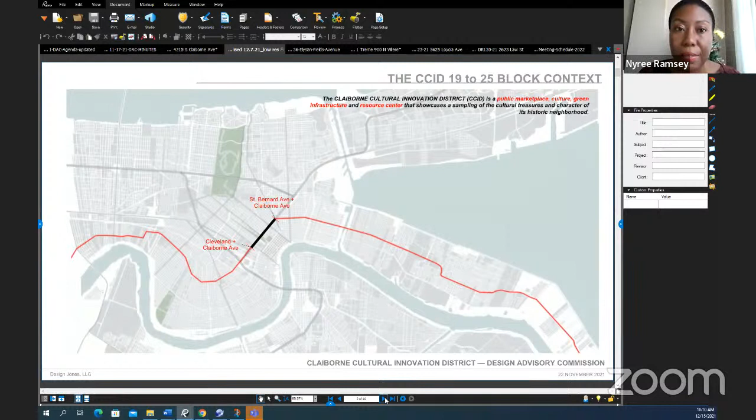Just to give you context, as we were going around and doing the charrettes to get this project done, to come up with the master plan, we recognized the need to speak to community interests. And so the project was split up into 4 zones. And what you see at the far right of that corner is how it has expanded.

We knew that there was an opportunity to really take advantage of some stormwater management initiative that the city is already working on, so we just wanted to let you see the full map of the area. We won't be talking about that area, but in addition to the 4 zones, there was an additional 5th zone where we wanted to take advantage of where the oak trees still stand in New Orleans along St. Bernard area, from St. Bernard to Elysian Fields.

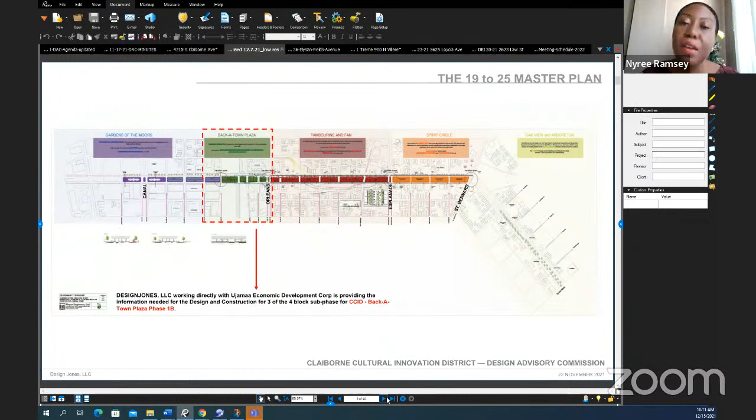So that'll be later forthcoming, but we like visioning with this group, wonderful team. Next slide.

So what came out of those charrettes are how can we make these improvements and these enhancements? And so what's at the top of that screen are what these enhancements are going to detail. And yes, that does mean a coordination of the city, the state, and even the federal government as we look to see some additional infrastructure support: cleaning and maintenance, infrastructure, lightening it back up, pedestrian protections, the furniture, which you'll see through this presentation, and of course art and color, that was approved at the last presentation, and we'll go over those improvements and enhancements again.

To orient you to the 4 areas, on the left of that screen is the Gardens of the Moors, where we really do pay homage to some of the African influences in New Orleans. Back of Town Plaza, taking advantage of the relationship to reconnect communities between the Lafitte Greenway and Lehman Park. We'll talk specifically about how we'll do that in this presentation today.

Then Tambourine and Fan, which is the area between Orleans and Esplanade, is really to celebrate the wonderful culture of New Orleans and of course our civil rights icon, Jerome Smith, who founded that organization, that youth group. And so the area there, the market, will focus on youth initiatives.

And last but not least, Spirit Circle, which extends between Esplanade to St. Bernard. What you can see in that section a little bit, there used to be a roundabout at that area. So we have been in talks with the Regional Planning Commission, in addition to DOTD, in terms of how we can get that roundabout back. That, of course, is another way in which we can think about how to slow traffic and protect pedestrians. Next slide.

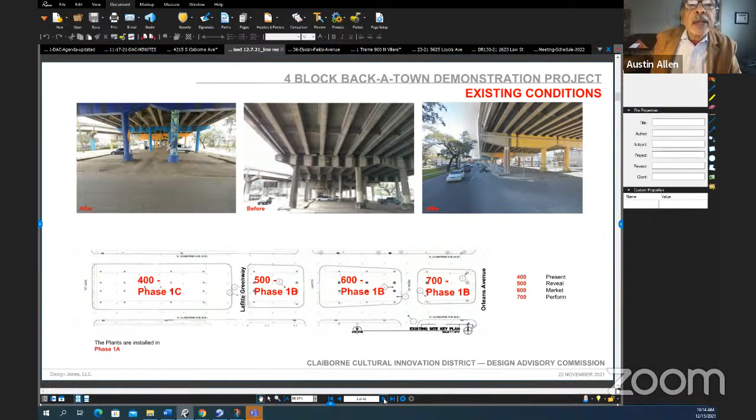What's important in the photographs up above is you can see we've begun some of the mural work. You can see those marks coming down on the bridge are caused by water dripping from above. There were some corrections done. If you look all the way to the right, the Department of Transportation and Development actually put in a gutter system to block that kind of marking from happening. Next slide, please.

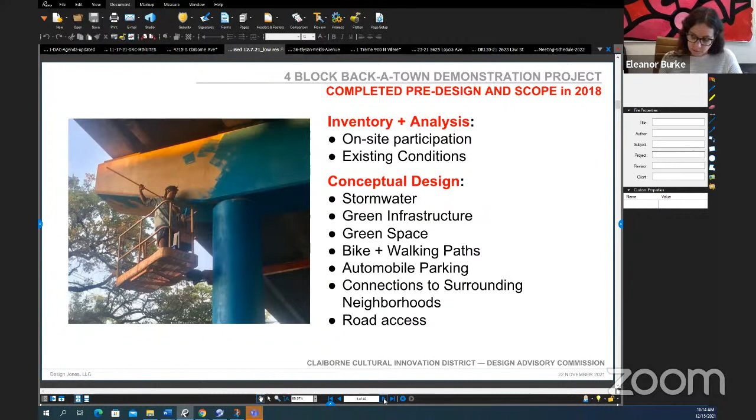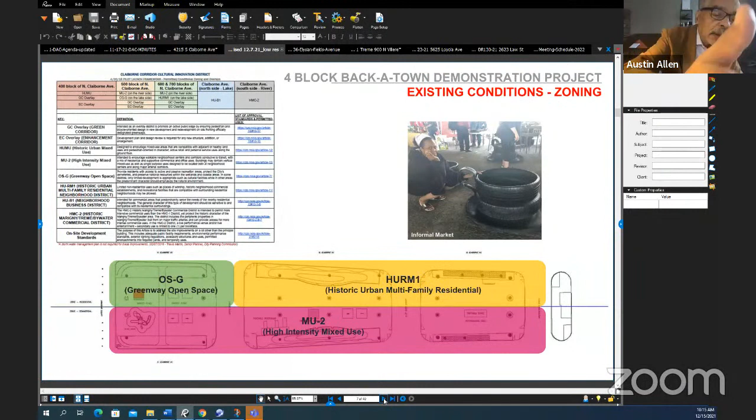These are the things that we went through in terms of 2018. Let me go to the next slide, which I think is significant. We fully respect the zoning code as it exists today, and you see it is right through the middle of the neutral ground where the divide happens in the zones. So we have structures, or even temporary structures, below that line and over at the Greenway open space.

Next slide, please. This was from the March 7th meeting. I just wanted to make it clear that we had approval for canopies, string lighting, and landscaping from the March 7th, 2018 meeting. There was a request that we get approvals on all those items, and those things were approved, at least those initial elements, through the 1A.

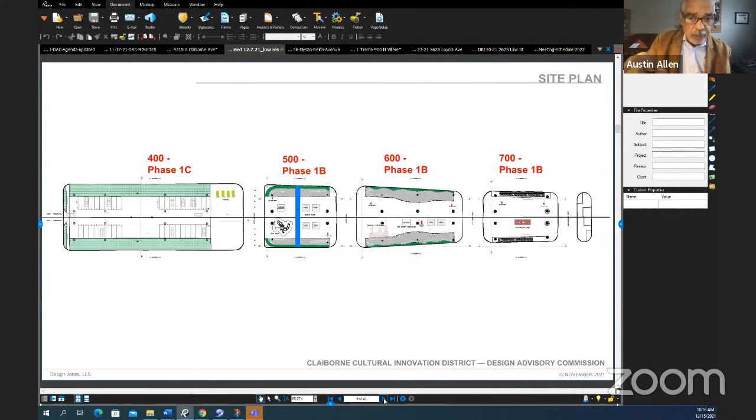Next slide. This gives you a master plan, and you can begin to see how we're dealing with everything from stormwater in the green areas to parking in the 400 block, and some of the other things we've got planned in terms of 500, 600, 700. Next slide, please.

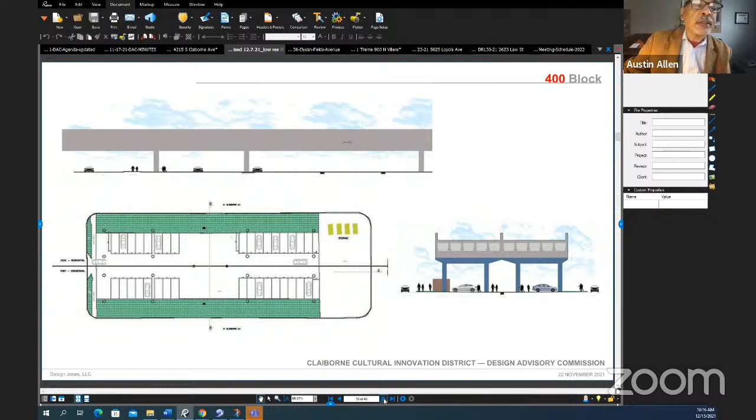In the 400 block, as you can see, the storage, those four lime green rectangles, are containers that will be in the 400 block to store kiosks and other elements of the public market that will be there. In those blank spaces in the parking, there's room for at least an additional 12 more parking spaces if needed. Next slide.

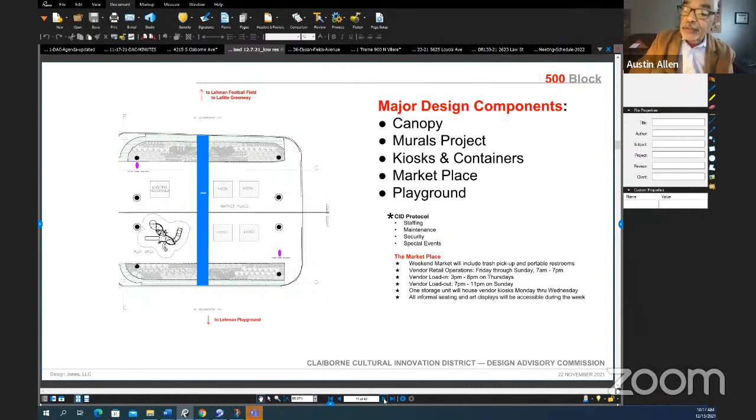In the 500 block, you can see its canopy starts here. The mural project has already started. Kiosks are used here. This is the active marketplace beginnings and a playground. The blue strip going through is a linkage between Lehman playground and the Lafitte Greenway that cuts through the block. You'll see that if you're there on location, it stops right at the neutral ground both ways, and this is a continuation. Next slide, please.

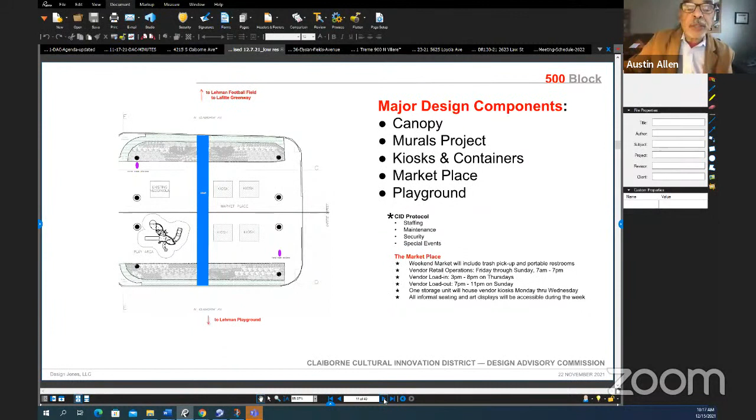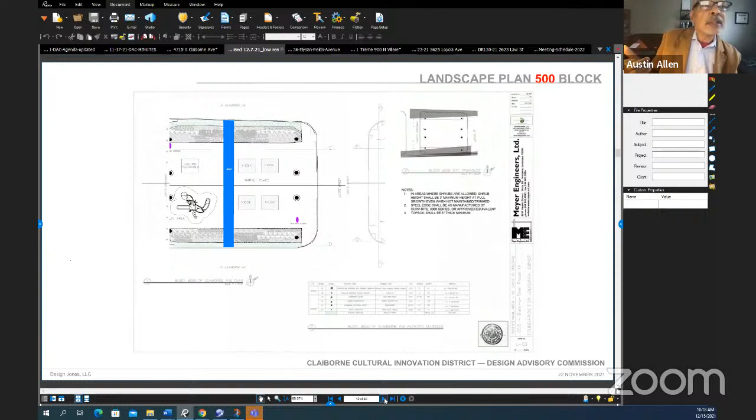And this, of course, comes from 1A. We just wanted to put it in so that people knew that the landscape part of this had been approved, and had DOTD approval too, in terms of being able to site things in terms of automobiles. Next. That concludes your 10 minutes to present.

The committee can now ask any questions they may want for clarification. I'll point out that if the committee feels additional details are needed to complete our review, I already spoke with the applicant about that, and possibly we can be clear about what we need and they can come back at the January meeting. Or if you feel we have enough to review now, that would be fine. But this document shows more scope than they're really requesting us to review at this time.

So if we want specific questions about the scope we're reviewing, now would be a good time to discuss that. Can we get a definition of the scope we're reviewing right now? Because are we only looking at 1B? Yes, we're looking at the 400, 500, 600, and 700 block.

And the 400 block is going to be parking, storage for the markets, and stormwater management. So already we can see that not enough details are provided for that block in terms of parking layout and pedestrian circulation within that area. And we may want to see further details on the storage containers that would store the temporary markets.

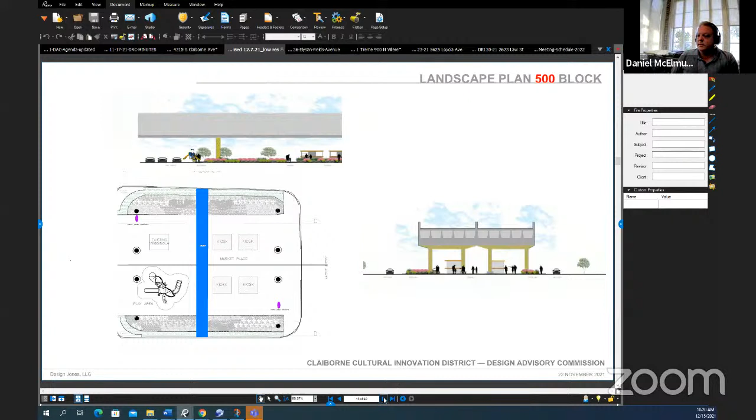And the fourth item is that there's going to be some site improvements around the public markets. And I'm seeing that additionally, there's the playground that we would be reviewing. Can we go to 2 more slides down, please? Did I mention the canopy? Because that's kind of the main element. That's what we're going to.

So on this - this image is very similar to the image that we were sold in the first review in 2018. So my question is, is the funding in place to put this in place in this project?

Yeah, the answer is yes, the funding's in place, and there will be improvements to this, to make sure that it fits with all the elements that we have there. For instance, one of the main things to keep in mind in terms of the improvement is because DOTD, to our requests, did put up the gutter system. So we do have to take that into account in terms of how we put up the canopy this time, because the gutter system was not there previously.

Okay, well, that kind of addresses my next question, is who's actually putting up the gutter system? Is it going to be you or is it going to be DOTD? DOTD. Okay, and then, so like this image shows all of the cross beams as being white. Are y'all going to repaint them or just clean them to the base concrete? Or are you going to do the painting - the painting was never finished.

And I love this idea. I don't want y'all to think that I don't love this idea. But I want to see it executed and completed, not kind of left half done. And that worries me, so that's why I'm asking about funding. You're selling us this image, which is very bright, which I like. I think that's going to sell the space for people. So I just want to make sure this is what we're talking about.

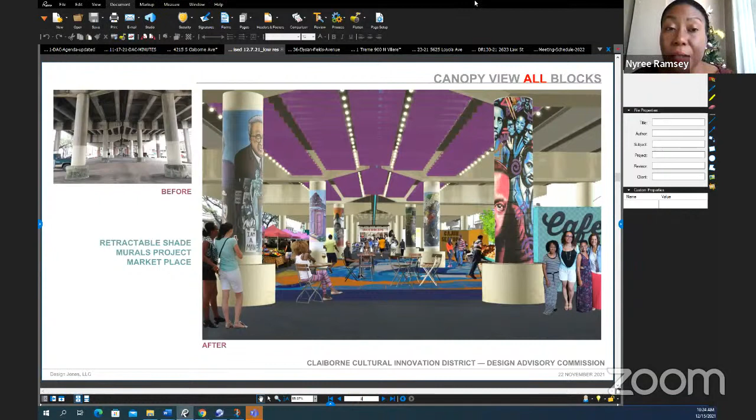Just want to clarify a few things again, recognizing this is a public-private partnership. We are all about making sure we identify the best resources for success. This project is actually being run through PlayBuild, which does most of their programming along the neutral grounds, and they take over space to make it inhabitable for children. This is just one component of it. The exciting part, and what we'll probably do for next time, Austin, is to share the slides of how we activate the space with PlayBuild so you can see how the children are protected from the street.

The area will be this is a container. So that's the innovation part. This will be closed off, so it will not be in use unless there's actual activation by PlayBuild under the bridge. We just want to make clear that there's a space for young people when the marketplace is happening, and when other community events are happening under the bridge. We wanted to include our youthful spirits, but it will be managed by a particular organization.

So is it going to be the play equipment showing on the left, or the play equipment on the right? Which one are we talking about? It'll be a combination of both, but we wanted to be clear in terms of how we could manipulate the container to be something as detail oriented as the slide on the left. But certainly we wanted you to see the container aspect, which is the design on the right.

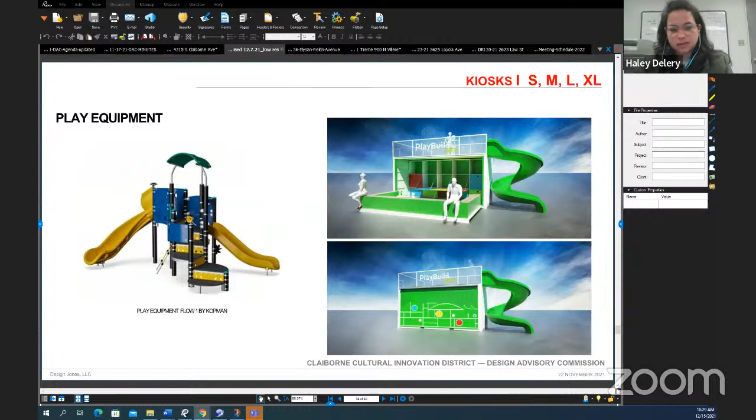Hey, let me say one more thing, echoing something you said at the beginning. A pedestrian plan is critical with this, just to understand how people are moving into the spaces and crossing the streets. So pedestrian plan is critical, incorporating the sidewalks on South Claiborne.

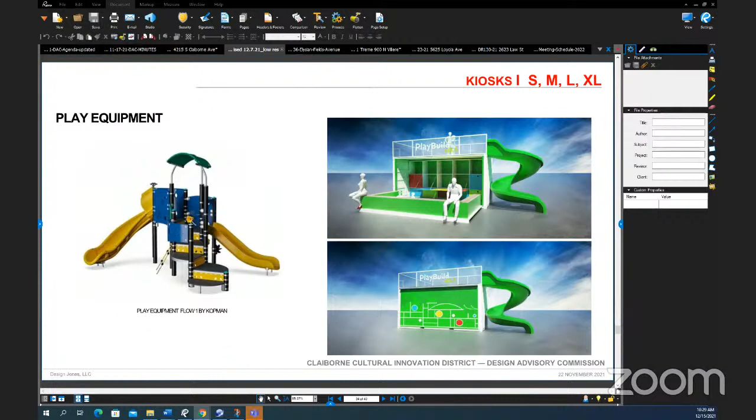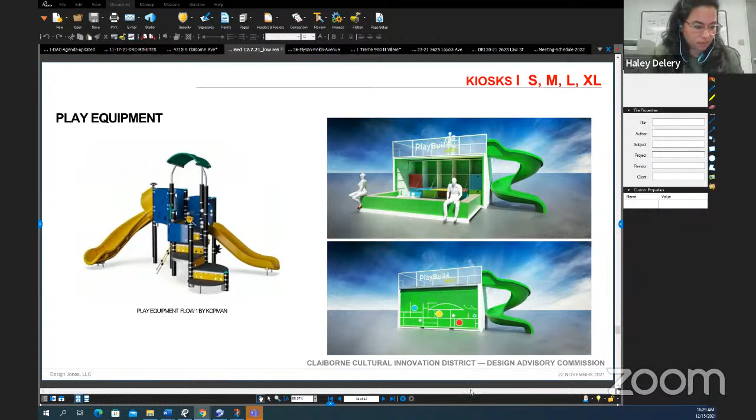This property is at 4338 Elysian Fields Avenue. This is going to go to the City Planning Commission. It's a proposal to construct a community facility on a site with over 100 feet of frontage in an EC overlay. The staff planner is not yet assigned.

Yes. So what the owner is trying to do is build a community center. This is the church entity that currently owns the property, and what they would love to happen here is a community center. They do a lot of community service with food bank services as well as disaster relief, and they want this to help with health in the community. They also have a partnership with the local university so they can do further work with that same entity at this facility.

Currently, what will be there, I think in our floor plans we had a basketball gym, but it's mainly multi-purpose, as well as kitchen, office, and restrooms. And that's pretty much it.

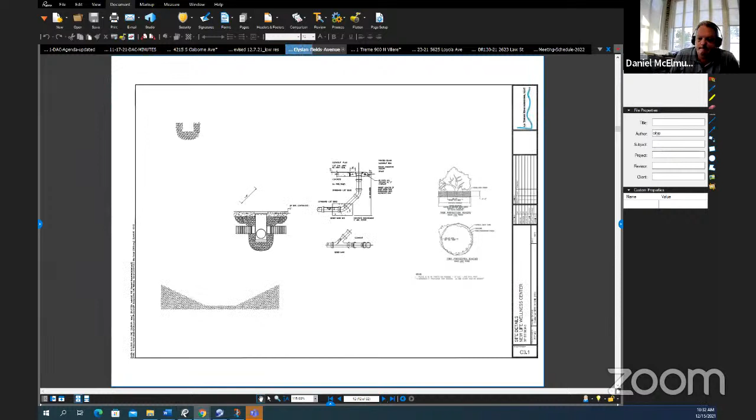Thank you. Is there any committee discussion on this item? Is parking allowed in the front of a building on Elysian Fields? It is in the zoning district. We've worked with some of the departments and made revisions along the way to the site.

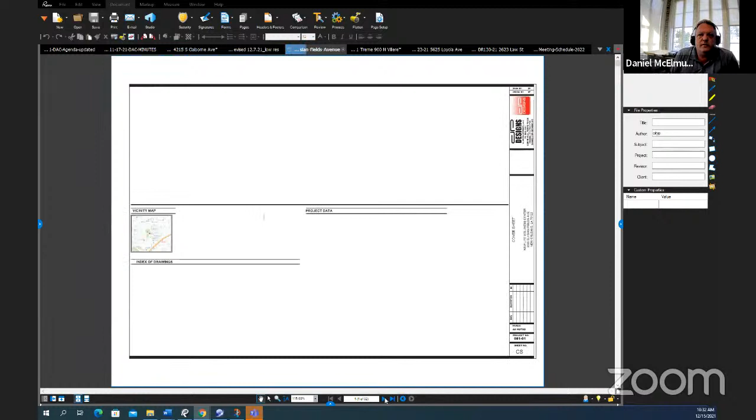Are street trees required, or is this a different zoning that doesn't require street trees? It's a residential district which does not require street trees.

Hi, this is Louis with Public Works. We want to look at the driveway. So in the city, it looks like you have a mountable curb here. We would just be running a mountable curb, or a more straight driveway from that curb. It would meet the sidewalk at sidewalk grade, so there wouldn't be any ramps like you're showing, on page 5 of the PDF.

Okay, so it's a little different than what you've got drawn. Then we'd like to see a sidewalk connection to Stephen Girard and Elysian Fields, if you could. Coming awfully close to it. I don't know what your grades are over there, but we normally like to see some kind of connection besides just that driveway.

Okay, if we can extend our sidewalk along the building to Stephen Girard. Okay. And the only other comment I have is that for these plans, you will need to submit a tree protection plan for the 2 live oaks existing in the public right of way.

This is Stephen Kroll with City Planning. I'd encourage you to look at relocating the dumpster, possibly back here. It's a highly visible location, and I'd encourage putting it in a more inconspicuous location. Okay.

I'm curious about the elevations of the structure. I think it's Plan A4.0. Do you happen to know the page number in the PDF? No. Page 20. Was that 20, Eleanor? Yes, page 20. Can the applicant describe the materials?

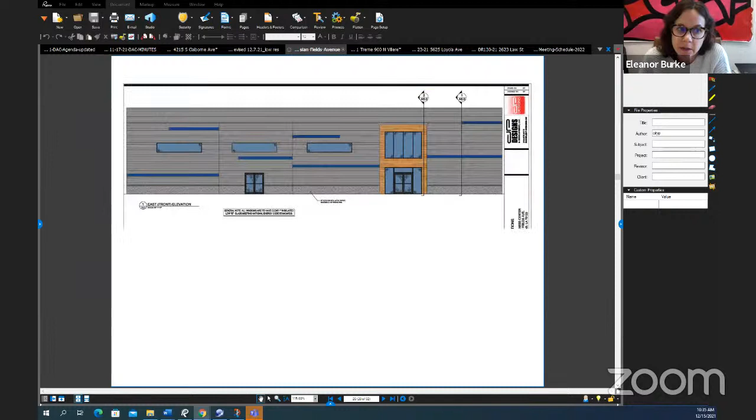Yes, right now they have wood at the main entry. In the main entry they have glazing in the wood, and then they have metal paneling, horizontal, on the side with glazing to let light into the gymnasium.

Does the wood panel project at all, or is it coplanar with the metal? It projects 1 foot off of the facade. Does it wrap around as wood? Yes, it returns as wood at that entry point. So that entry point sticks out 1 foot off of the elevation of the rest of the building, and it does wrap and return back into the building.

My feeling would be that the projection might be more successful if it was done in metal panel, but maybe with a different treatment. I find the insertion of wood at this part of the building just kind of out of sync, maybe not as successful as it could be. My other question was for the CPC staff: do they have glazing requirements at the front elevation they need to meet?

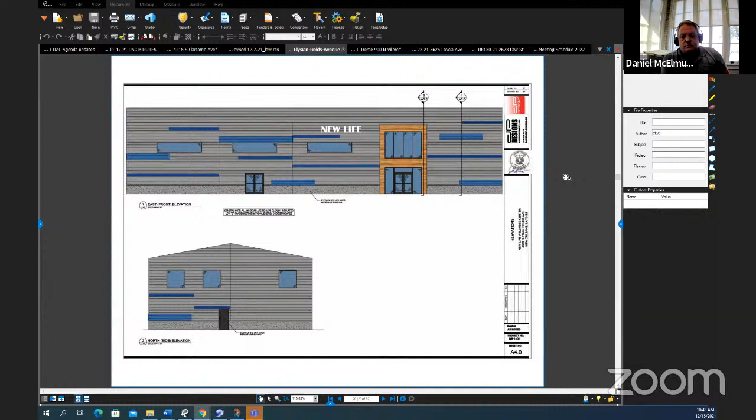It's a corner property. We have required this on others to either put the parking on the side and have the building be on the corner, or have the building completely face Elysian Fields and have the parking against the cemetery. The context, to me, is that it's up against the cemeteries. So it's not really, it doesn't bother me, but it kind of looks like a warehouse. And we can work on the exterior skin.

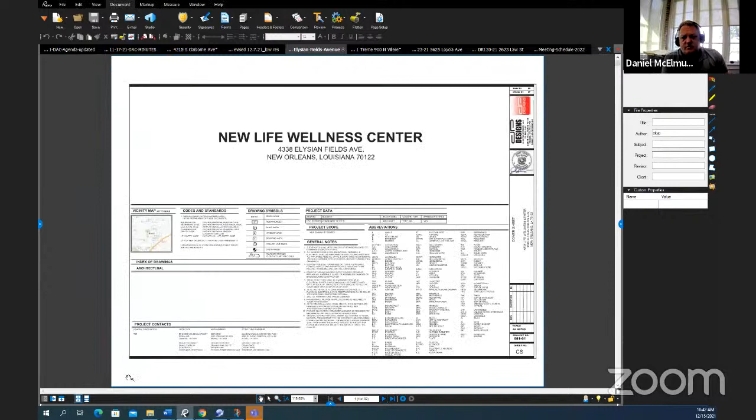Now, let me ask you something in that regard about moving it to the curb. We've tried to move the front, and I think the problem is going to be access. And if we lose parking or don't have an adequate number of parking, would there be some kind of variance when flipping the building? Aren't y'all asking for a variance if we move the building now? Well, I would probably have to if I had to.

Well, I couldn't fit the building at its current size if I had to move the building to the corner, because we did look at that. And then put all the parking in the back, and then you would have to, of course, not come off Elysian Fields, but off the side street to get into the property. So pretty much the front would face the cemetery. Even though I would have a front facing Elysian Fields, we would technically have to have two fronts.

But I think when we did our schematics, the parking, we lost parking. But my question is just, if we don't meet the parking requirements, is there a mechanism for asking for a variance?

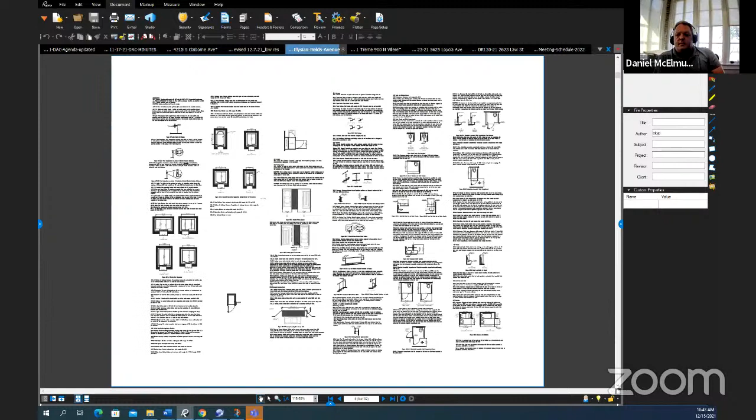I don't know how you would lose parking if you just flip the property line. If you just flip the layout and come in off Stephen Girard from the end, you're not losing any parking. I don't understand how you're losing parking when all you have to do is literally mirror it and remove that driveway coming off Elysian Fields, putting it instead at the end off Stephen Girard. That will allow your customers to come in off Elysian Fields, regardless of the direction they're on. Whereas if they're coming off Stephen Girard, you've got an immediate option to go left or right on Stephen Girard, and then left or right on Elysian Fields, versus only one direction to come in and out on Elysian Fields.

So I really don't buy that you can't have pedestrian access to Stephen Girard and Elysian Fields, and easier vehicular access, if you flip this site to have the building in the front and the parking lot in the back, between the building and the cemetery. I just don't see it as a problem.

This is Haley. This has not yet been assigned to a staff member at City Planning. However, just to answer your question, when we review the conditional use, there is an opportunity to review a consideration for a variance for parking if it's necessary. I just want to point out that this is the advice from the DAC, to reorient the location of the structure. It would be great if you could take these comments into consideration and do that.

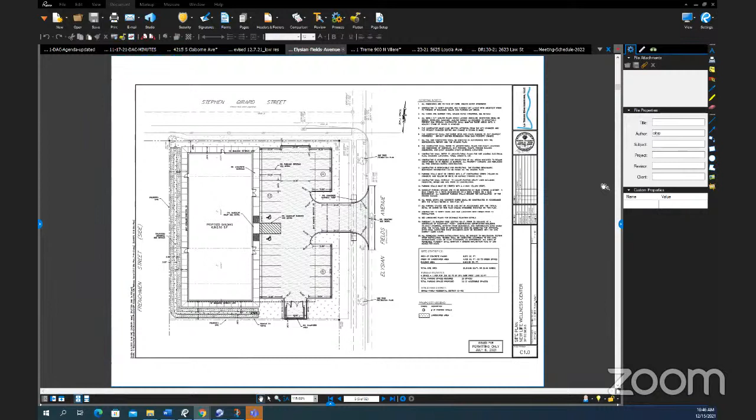So I appreciate your willingness to work on that. The building will definitely be, and really we'll try. What we'll do is try to see what we can do with the building, in the same regard as it now being a corner building, pushed up against the curb. We'll see what we can do to help delineate it, keeping the metal but not being perfectly flat, especially with the parapet heights, and then maybe some protrusions, playing with the elevation of it, to break it up. Hopefully that'll help. We can definitely play with the skin once we move that.

And I think you have some foundation planting requirements. Planning can answer that question better, but for your on-site stuff, I think if you do flip it, you'll actually have a better opportunity to do the foundation plantings and remove some of that sidewalk. Because then you can use the Stephen Girard sidewalk and the Elysian Fields sidewalk as part of your site circulation, versus having to put in your own sidewalk, and that'll reduce your stormwater runoff as well.

I think also, flipping it will give you the opportunity to play up the corner as an entry, which is fairly common for corner buildings. That could provide some opportunities for design interest at the corner, which could go a long way toward enlivening the building and helping it feel more nestled in this corridor.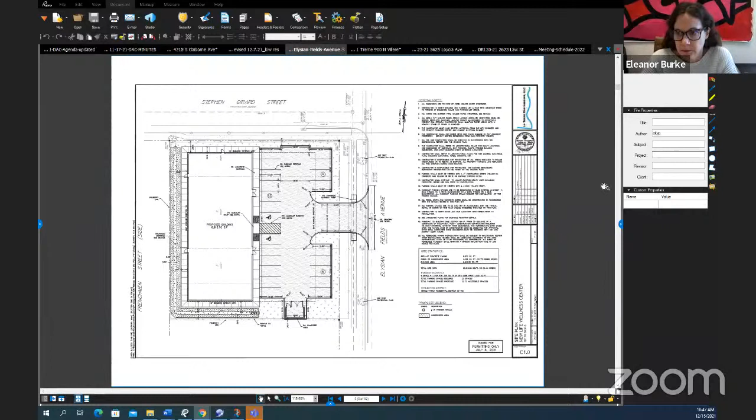Okay. Can you kind of talk to us about the two entryways, and why you have two entries in the front?

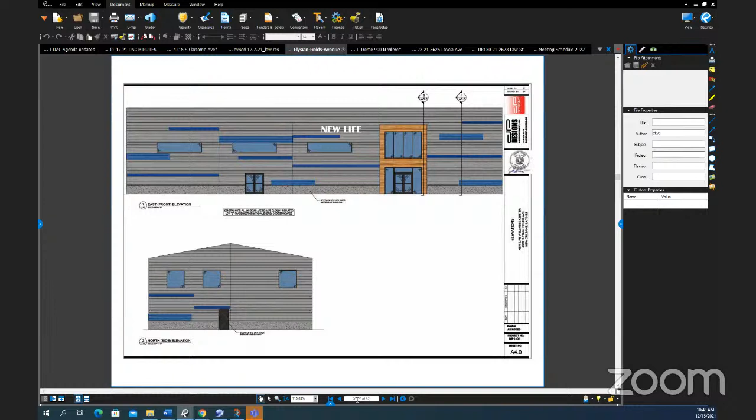Well, originally what we had was one main entry, the one with the wood paneling. The other entry was mainly there because of the egress out of the gym, but also the church looked at disaster relief and mass food drives, mass people coming into the building. It's easier to have them circulate directly into the gym for clothes giveaways or food giveaways, getting people in and out without having to circulate through the lobby. The point of the double door entryway was to get people in and out of the building, or even serve as a serving point.

They said for disaster relief, with one of the entities they work with, they may have the gym full of goods and things to give away. You can literally line the sidewalk and directly hand things out. That was the point of having that second entryway right there.

Okay, it may shift to the rear of the building now that you're putting the parking in the rear, and the main entry may go towards the corner. This may help with how the organization of the windows and the structure look.

No, I think what's going to probably happen is when we flip it, the building will kind of get mirrored. So what we'll try to do is have some of these same elements, taking into consideration what the board has said today, but also trying to fill that corner to make sure we have a nice corner entry into the building. So we'll definitely work that in.

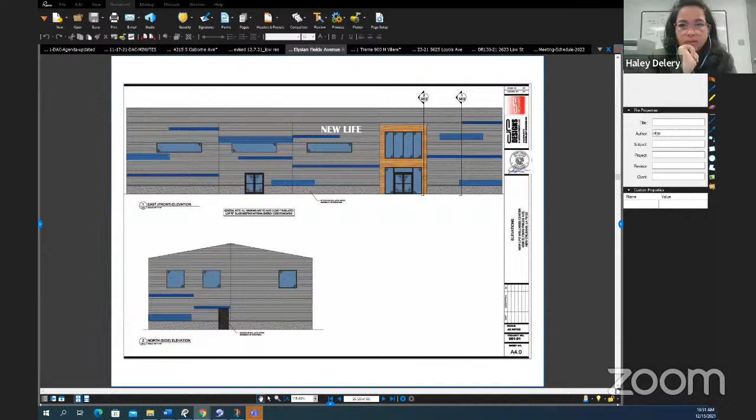Alrighty. I think the comments the committee has made are very clear, both to us as staff and to the applicant, so I don't know that it needs to come back to DAC. I think we can handle these comments administratively.

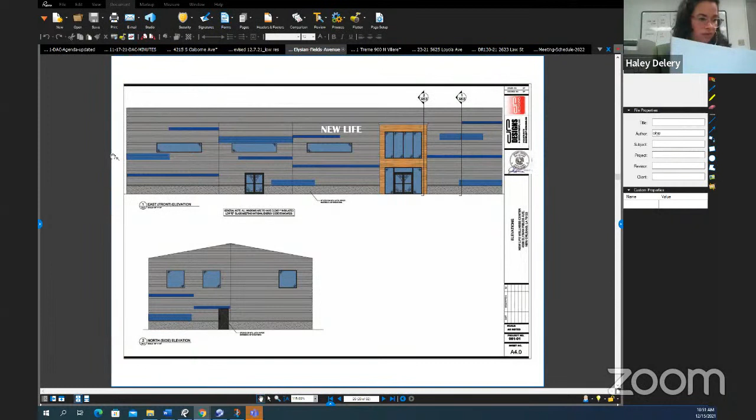Now we're moving on to item number 5 on the DAC agenda. This is design review docket 7621 for Treme Recreation Center at 900 North Villere Street.

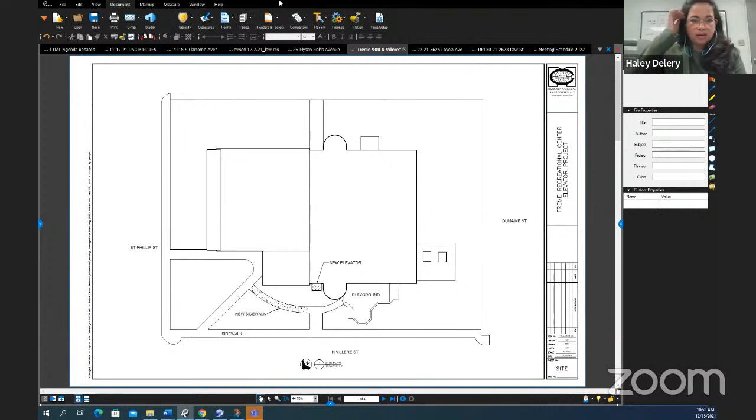We previously reviewed this at the DAC meeting and had requested that the applicant come back and provide us floor plans so we could review alternative locations for the elevator, because placing it at the main entry was not a satisfactory solution. Between that time and now, Capital Projects met with the community and have also added to their presentation additional justifications for why the elevator could not be located in an alternative location.

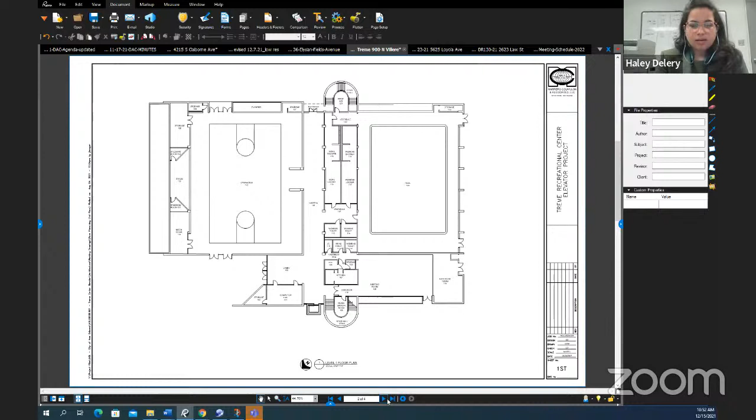City Planning has spoken with Capital Projects and said that the advice of the DAC, because this is a public project, is not binding. It's up to the sponsoring agency who submitted it whether or not to take the advice. So just keep that in mind.

Okay, yeah, this is Carlos Duran. And actually, Robert, so Greg DeCourcy, our architect, is on vacation, so I was sitting in for him on a meeting. Robert, you're gonna have to help me here.

I know from talking to Greg that several locations for the elevator were looked at and considered. Because of code, structural issues, space issues, egress and those kinds of things, the elevator wound up back at this position, and it's just the most logical place to put it.

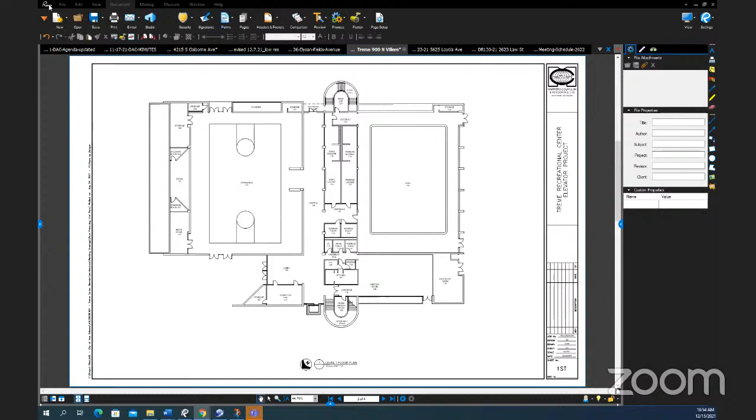One of the other things everyone needs to understand is that the back of the building does not provide the security aspects needed. Also, state fire marshal requirements mean putting an elevator with an exit there doesn't provide enough space for exiting the building. The main reason we decided on this area is, one, the security from the front desk, which is directly across from it, and it's accessible to the elderly so they don't have to go the long distance of the corridor, they can just easily go into the elevator to the second floor.

So, like Carlos said, we viewed many different aspects to this. The location we have also provides sufficient support for the elevator foundations, and it creates a better building aspect there.

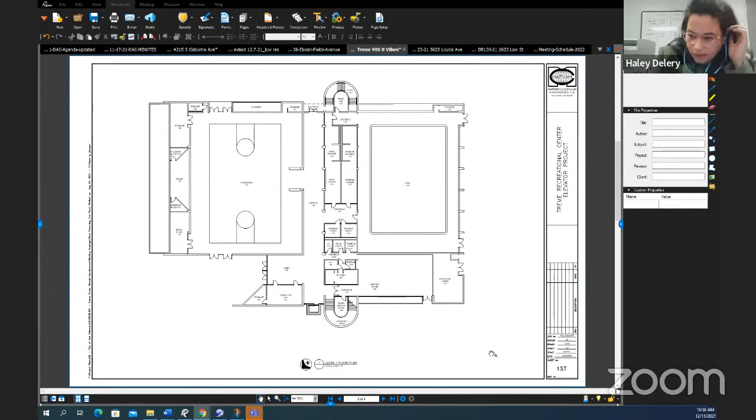Okay, thank you. Does that conclude your presentation? Yeah. Okay, thank you. And I would just like to ask, how did the community meetings go?

We arranged two different meetings, three weeks apart. Nobody came.

Is there any further committee discussion?

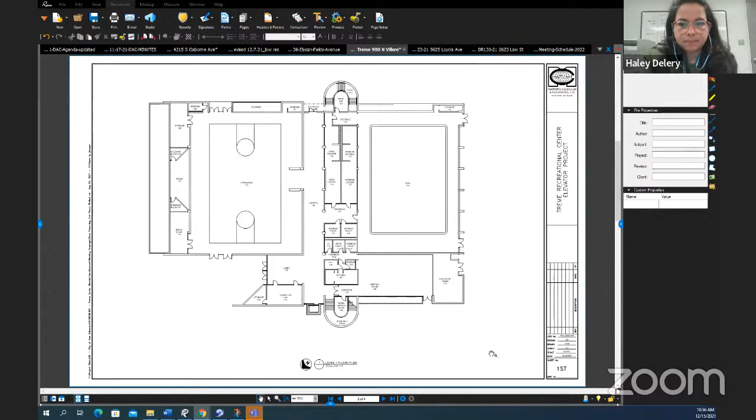We go back to the site plan showing this proposed sidewalk. I assume you know this, but there is a hill there. So this looks pretty good in 2D, but are y'all planning on building some kind of retaining wall, or regrading the site somehow? We did not plan on regrading that I can recall.

There is an existing sidewalk in there that we were just going to re-pour. Is it an existing sidewalk that's already where that new sidewalk is shown? Yes. How recently was that built? It's been there since the building was built.

We're talking about this sidewalk that's being called out as a new sidewalk. I see, that's right off the main walkway and it leads into the playground area. There was a straighter sidewalk in there with just a little curvature. The elevation doesn't change until maybe about 20 feet further inside that area. But there wasn't a new sidewalk there. There's no sidewalk there.

Oh, I'm sorry. I thought there was. No, there's no sidewalk there, but there's landscaping, there's elevation, so it's like a small hill there. It's not as simple as what's shown. I think it would require some kind of regrading, or either that or cutting into it and building retaining walls on one side or the other in order to make it work as shown.

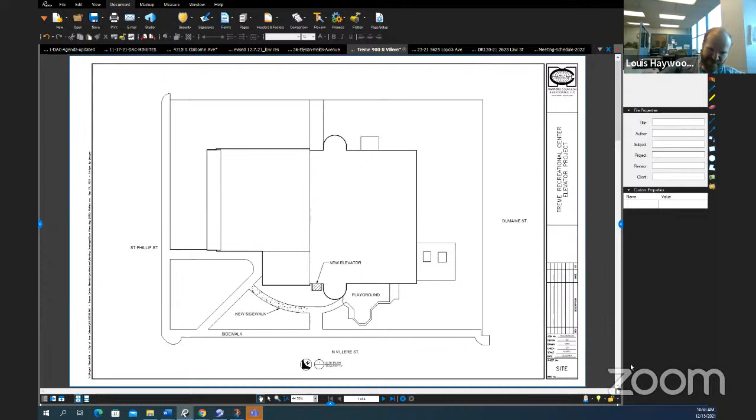Robert, what's the funding source for this project? State funding, state capital outlay, and bond money.

You do know that every time you dig around the Treme Center, you have to have archaeologists. Yes, we do, and we have already contacted the archaeologists on that. Okay, good.

Louis is right, that was going to be my point, that in order to do that sidewalk, you're going to either have to cut into it to have it at grade with the other sidewalks, or it doesn't matter, you're still going to have to excavate. Right, we'll need some minimal excavation in there. And then, because it has to be accessible, you can't have more than 5% slope.

Correct. Then tell me again why it can't be in the stair tower. I know I keep harping on it, but I don't buy it. The stair tower in the rear, not the one in the rear - I know that's the fire exit and all that other stuff. I'm talking about the one that's right there, immediately to the right of where it's located, in the music room, and then it lifts up to upstairs where there's just a planter right now that could be a lift.

You don't even have to do a complete elevator shaft. You can just do a lift system and have it go up right there. I don't understand why it can't be put in that space when that's what that space was designed for. We looked at lifts and it just doesn't give the flexibility for the elderly in there. This is a more secure area to put an elevator in this location.

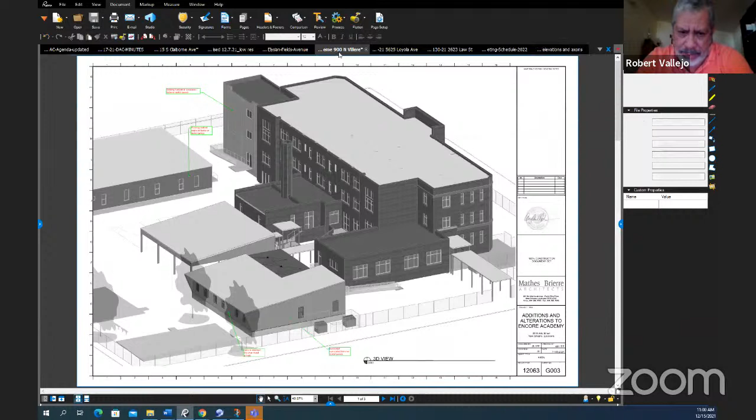Well, we looked at all the different chair lifts along the corridor. It didn't make sense for it. The entrance, when I was over there, is generally locked at nighttime. And the entrance on St. Philip Street is one of the main entrances that the general public is using at this time. In fact, the last time I was there was last Tuesday night, and the center had already blocked it with tables and chairs.

They had a dance recital going on at the same time, and they wanted to check everyone there for temperature and entry points. So they left the St. Philip Street entrance open. They were not using this North gallery exit entrance. So I beg to differ with you on that.

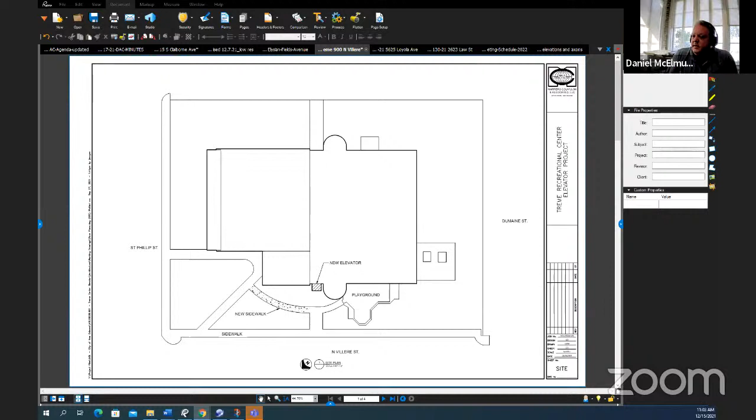It's exercise, and there was also an arts and crafts room, I think, for ballet practice and all. There's a dance room and multi-purpose rooms on the second floor. Okay, all righty.

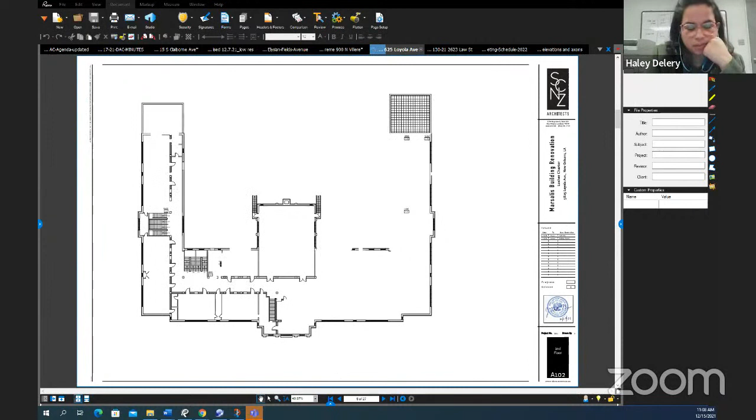Is there a drawing? Stephen, are you able to flip through? We can, yeah, I'm flipping through. If there's any particular sheet anyone wants to see, just let me know. All right, is it not displaying? We're seeing A101 and only the image at the top right has become viewable, it's slowly populating in. Okay, I'm on A102 now. Are you seeing A102? We're seeing A102, however the floor plan is not, it's just slowly coming available. Yeah, got it, okay. Just wanted to make sure things didn't freeze up or anything.

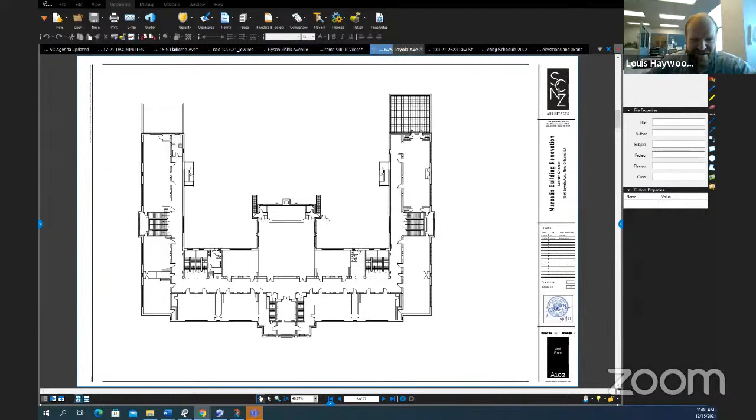I'll just jump in real quick, from Public Works, I need to see any sidewalk repairs that are necessary. Looking at the most recent photos, it looks like there's some lingering issues on Joseph Street, and there's probably a few other places where you just have some settled sidewalk creating some trip hazards, or sloping sidewalks. So just walk around and pick up any necessary sidewalk repairs. There's some broken sidewalks on Freret Street as well.

Particularly on Joseph Street, it looks like it has about maybe 20 feet of sidewalk that could be replaced. Some around the trees in the middle of the block, looks like there's some settlement around those trees, probably caused by some roots. Yeah, we'll definitely take a look at that.

I don't really have any comments. If there's no further committee discussion... Oh, could I ask one more question, just out of interest I guess. You're removing a sidewalk, or not really a sidewalk, but a walkway from Loyola Avenue in the site plan, that goes to that gate. What brought that on?

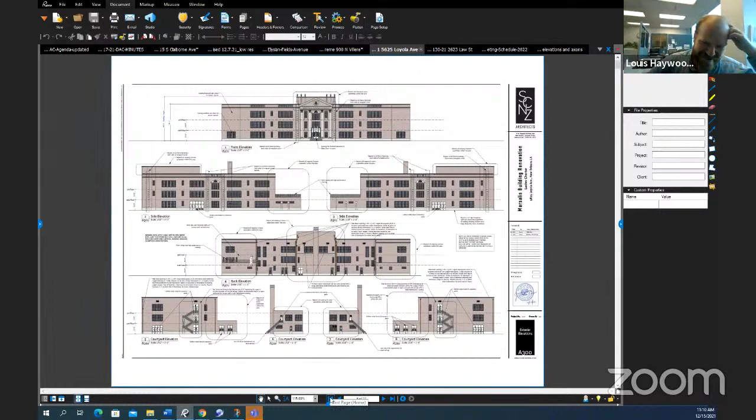Do you mean on the Joseph Street side, I think? This is coming from the Loyola Avenue side, going to the side of the school building in the back. Yeah, from the lower, on that plan, you mean the lower portion there? Mhm, yeah.

Originally the building had two entryways. Sometime during the 80s or 90s, that second lobby was turned into a classroom, and the facade was replaced with windows instead of doors. So basically that big paving that used to be where the buses would drop off the students and they'd go into the building now kind of leads to nowhere.

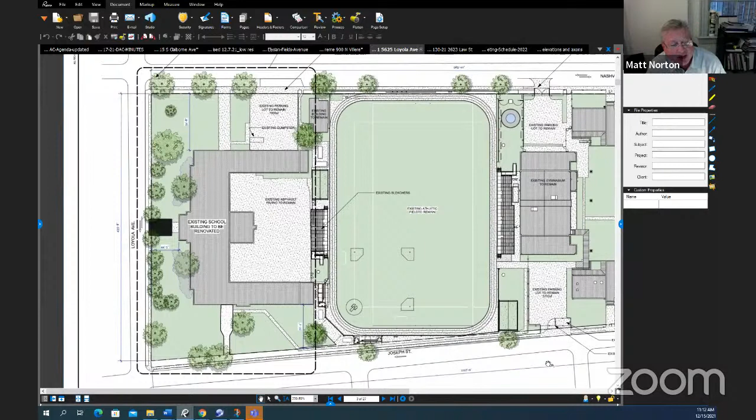So we're just taking the advantage of removing that and creating some more grassy area. That's the same thing, the walkway that goes along the face of the building to Loyola. If they're talking about that, Loyola is the main entry there, and right now they have concrete paving that's in really bad shape at that little entry plaza to the building. So we're pulling that up and replacing it with permeable pavers.

All right, I'll try this again. Are we talking about the same things?

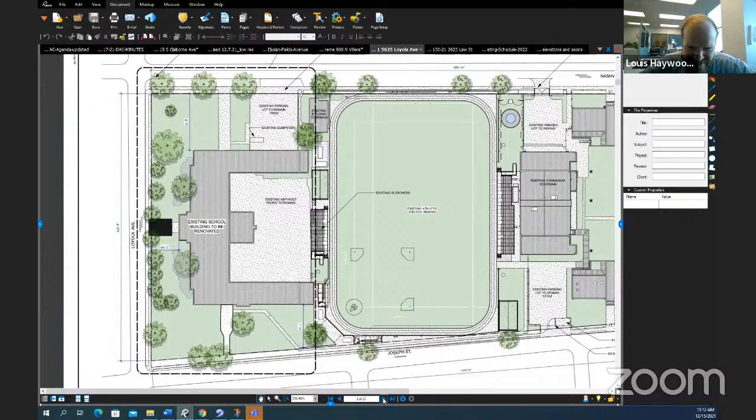So you're on Loyola Avenue, about 100 feet from Joseph Street. There's a sidewalk you're calling to be demolished in the plans, just a 6-foot sidewalk that's really not used. That was an opportunity to take up some paving that was superfluous there.

So you're not going to have—there's a gate there today, right? There's like a historic fence with a gate, you can see where it's pointing. There's an existing 3 to 3.5-foot high steel picket fence there with a gate in it. We're demolishing that and putting the new fence at the property line. So you're bringing the fence all the way out. Right, exactly.

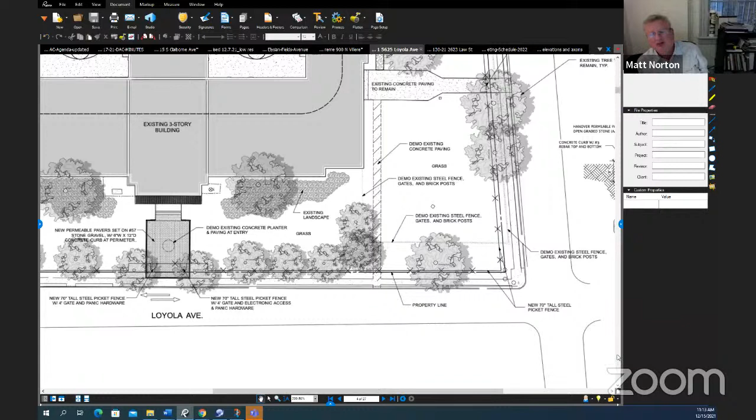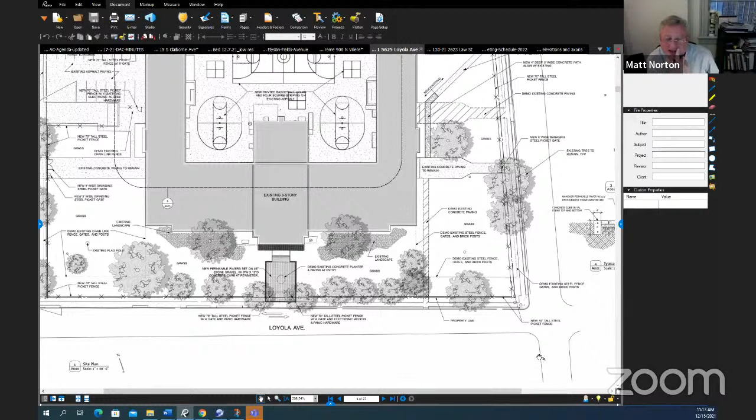Do you have a detail in this set showing how the fence is going to be installed? It's basically in the spec—a 70-inch steel picket fence. It'll have 2 rails at the top and 1 at the bottom with little arrow expressions at the pickets. It'll closely resemble the one Fortier has facing it now on Freret Street.

I'm less concerned about how it looks than how it's going to be installed, since you're hitting quite a few—at least 2—public street trees. I don't see a tree protection plan, or how the fence installation is detailed around these trees, where you're taking out the existing fence and installing the new one behind them. I think putting that fence right up against the trees is a bad idea. There may be a need to bump out the fence at those points so the trees have room to grow and don't mess up your fence quickly.

Yeah, I think that's along Joseph Street—those are very large crepe myrtles there. We will pull the fence back from the property line to allow them some room to breathe.

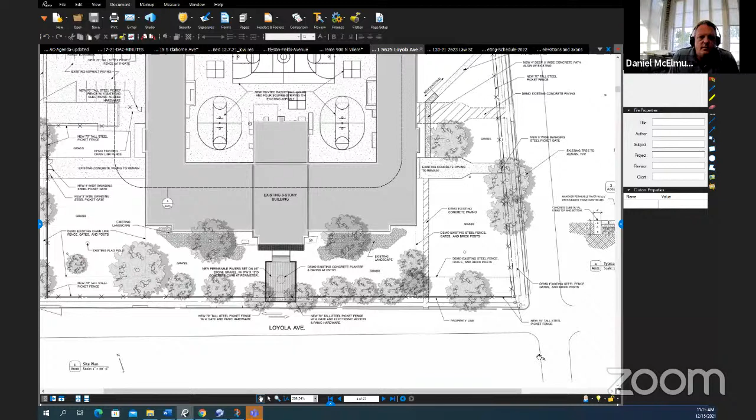And then you've got a lot of instances where little trees are going to be impacted by the fence, but no fence detail was provided. So I don't know if it's a running foundation fence or a post install, what is it? If you pull up this sheet, there's a little foundation detail to the right—yeah, that's it. So it's just at the post, there's a little concrete footing.

And I believe the posts—permeable paving detail, got it, right. When I was blowing it up, it didn't show that side. So you still need to talk about that situation with the trees, because you don't want to punch through the main root of a tree or something.

I think on the western portion of the site, from the main entry over on Loyola Avenue and along Nashville, we're basically replacing an existing chain link fence exactly where the chain link fence is now, so we could go back in the same post locations.

Well, aren't you going to pull it to your property line? Because it's kind of over the property line right now. It should be just within the property line there. That's not how it's shown—if you zoom in, it's actually shown off the property line. That might be just for clarity purposes, but double check when you're laying it out on your survey and have your surveyor make sure the fence is actually at the property line.

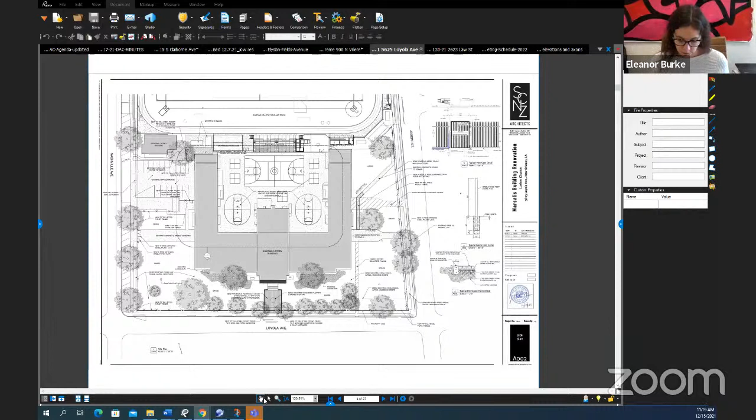Okay, moving on to the last item on today's agenda. This is a design review application we received for the expansion of an existing elementary school campus. The reason it requires DAC review is because the new addition of approximately 4,000 square feet brings the total square footage above 40,000 square feet for the campus.

What we already received was the campus development plan, because this also requires review since it's an educational facility. However, at this time we don't have elevations for the building addition, but it's appearing we have the perspective view. The next couple pages are just elevations as you flip through.

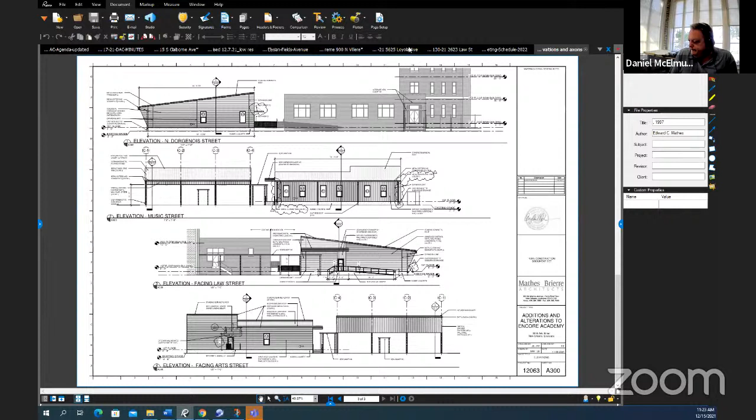Can you go back to the site plan real quick, please? So the new building is the unhatched building in this lot, in this view. North Dorgenois Street is currently just slated for complete replacement, so that's going to be happening simultaneously with our construction, and all the sidewalks on that side will be replaced.

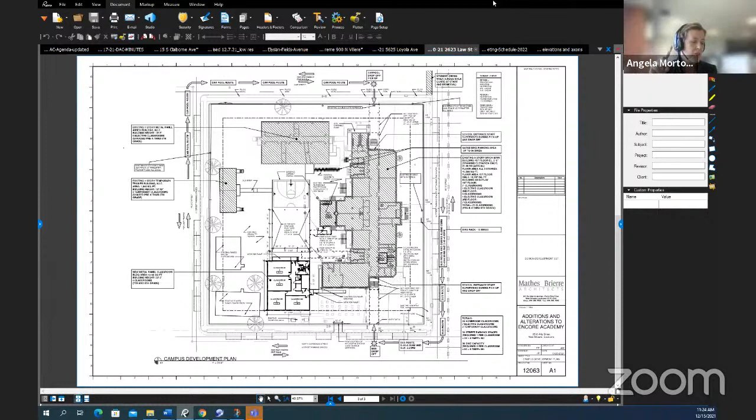I didn't mention too, there are 2 walkway canopies we're going through a BZA waiver for, extending out to the property line from the 2 main entrances, since we're extending past the 20-foot setback. They're simple aluminum canopy systems of 2 levels, with respect to the steps coming off the building, and then 1 wider canopy. The site's currently completely fenced with chain link fencing.

I don't have any other questions.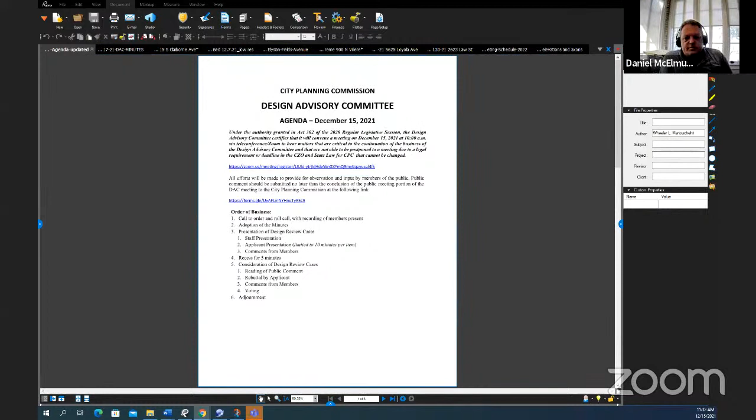I'll make a motion to approve subject to the applicant looking at the site, putting the building on the front on Elysian Fields, other site revisions in terms of parking and sidewalk access and site landscaping, and then for the architecture, looking at how the entries and the corner are treated with respect to parking and the public realm.

I'll second. May I just, before we second, ask if there's any architectural provisos we want to add to that? No wood. I guess I figured that the design recommendations would be included that were made. Okay.

Okay, we have a motion by Parks and Parkways and a second by HDLC. All in favor? Aye. All opposed? And the motion passes.

Next is item number 5, the reconsideration of Treme Elevator. I want to recommend to approve, subject to having some amount of documentation of public engagement responses and maybe addressing the issues with the sidewalks, with the paths that the DPW brought up.

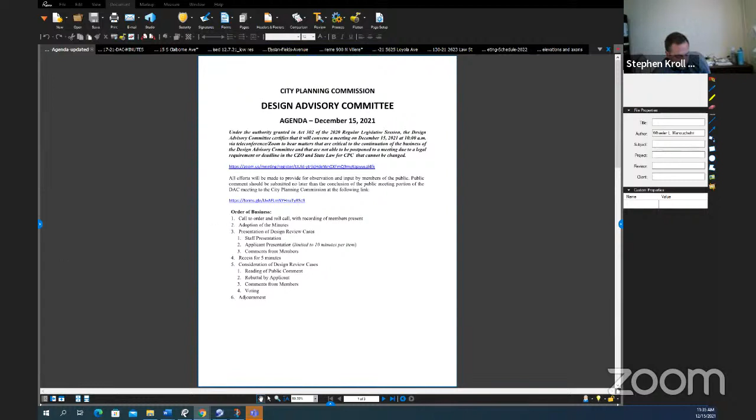Okay, we have a motion by Capital Projects for approval, subject to documentation of public engagement and the sidewalk modifications that were discussed. Do we have a second? Seeing that we did not receive a second, do we have an alternative motion? Haley, I'll second it. I'm a little slow on the trigger. Second by City Planning.

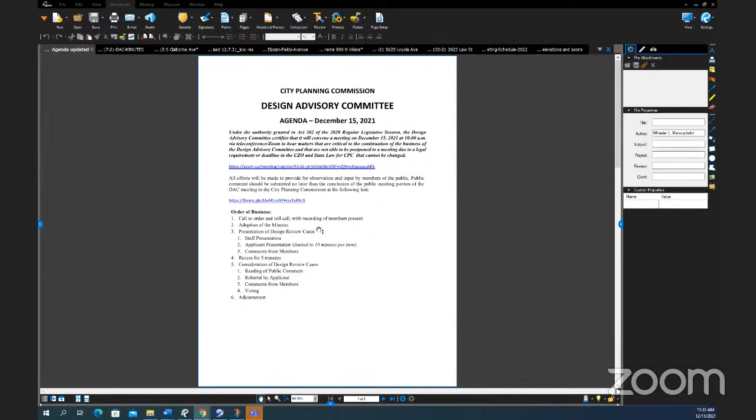I'll do a roll call vote. Stephen, aye. Haley, nay. Danny, nay. Miguel, yes. Eleanor, nay. Louis, nay. And Lindsay's absent. So we have 2 yays, 4 nays, and the motion fails.

Do we have a subsequent motion? Okay, so it goes forward with no recommendation.

And item number 6 on the agenda is for design review 12321 for renovations at an existing primary educational facility at 5625 Loyola Avenue. Make the motion to approve with the recommendations of the DAC.

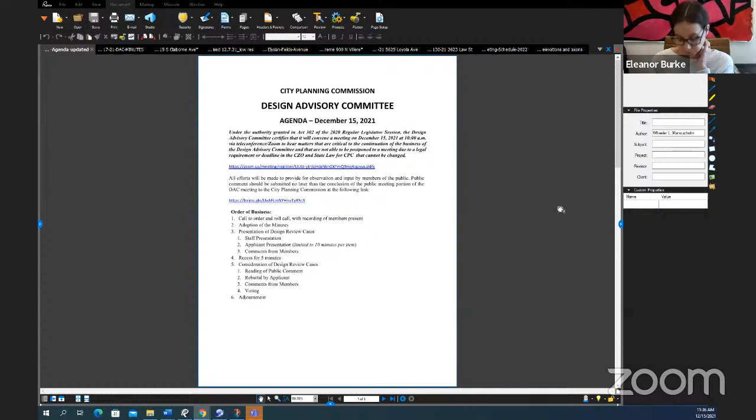I'll second that. Okay, we have a motion by HDLC for approval, subject to the recommendations that were made, seconded by Parks and Parkways. All in favor? Aye. Aye. All opposed? And the motion passes.

Item number 8 is the consideration of design review docket 13021 for an addition to an existing elementary campus at 2623 Law Street. I'll make the motion to approve subject to any DAC recommendations that were made.

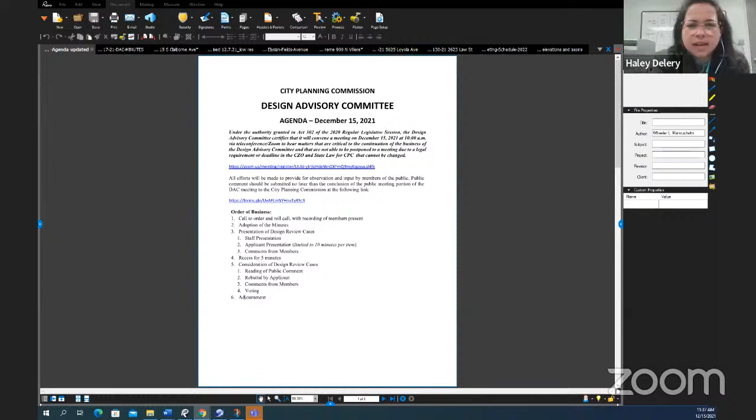Do we have a second? Second by City Planning. We have a second by City Planning. All in favor? Aye. All opposed? And the motion passes.

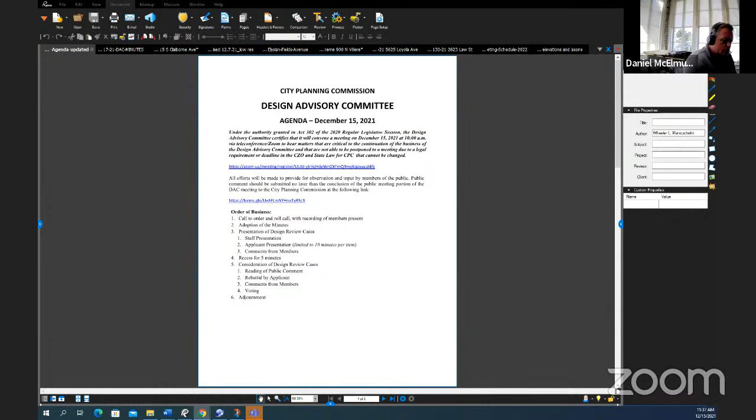Now the last item on today's agenda is the adoption of the 2022 Design Advisory Committee meeting schedule. Do we have a motion? We have a motion by HDLC. Do we have a second? Second. A second by Parks and Parkways. All in favor? Aye. All opposed? And the motion passes.